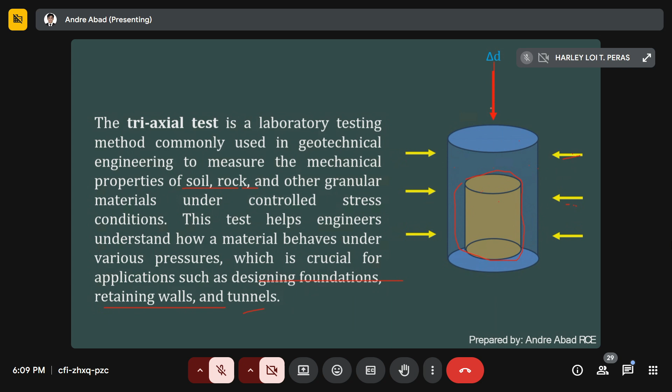Key components of triaxial test: sample preparation, a cylindrical sample of material.

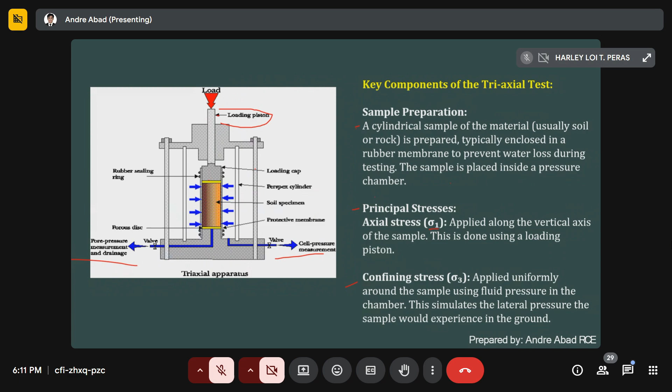Test phase would be consolidation. The sample is allowed to consolidate under the confining pressure, which allows the water within the pores to drain if the material is saturated. This simulates how the material behaves under long-term loads.

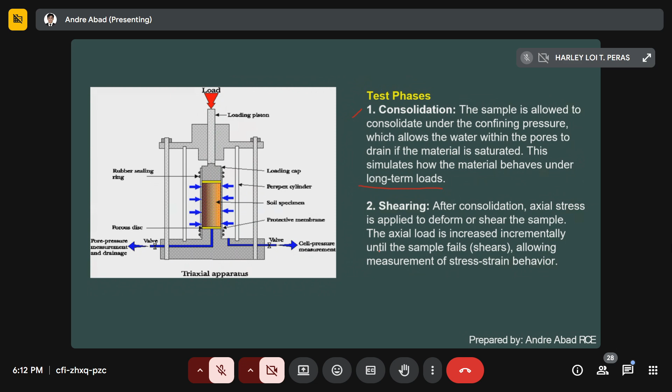Shearing: after consolidation, axial stress is applied to deform or shear the sample. The axial load is increased incrementally until the sample fails or shears, allowing measurement of stress-strain behavior.

Types of triaxial test: unconsolidated undrained. No drainage is allowed during the test. It is quick but provides only short-term strength parameters.

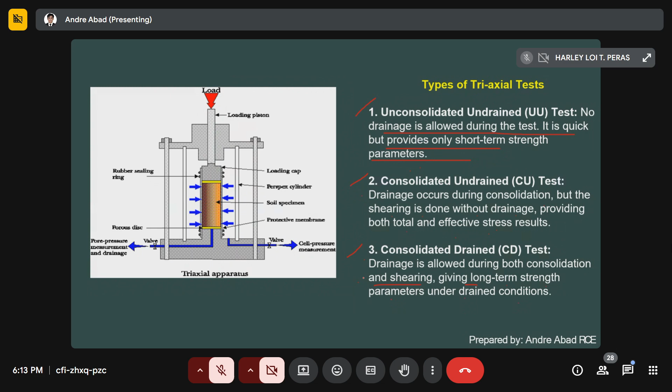Okay, so the parameter measured here is shear strength. The test determines the material's shear strength by calculating the maximum stress it can withstand before failure.

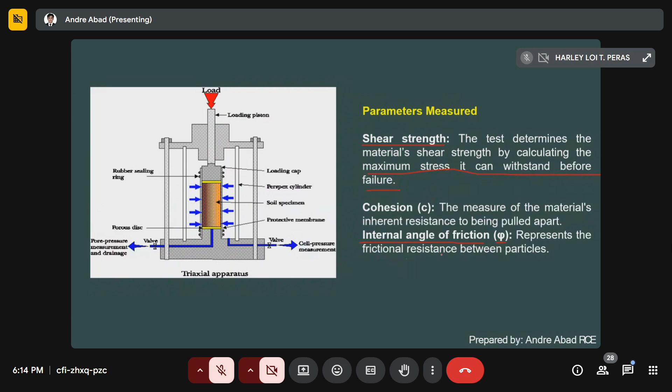And then cohesion, the measure of the material's inherent resistance to being pulled apart, and the angle of internal friction, which represents the frictional resistance between the particles.

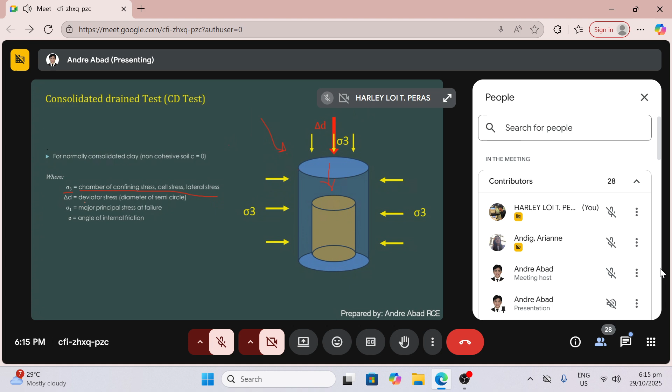And then the deviator stress, shown as the diameter of the semicircle, we can see in that form. The deviator stress is usually added on top of sigma 3.

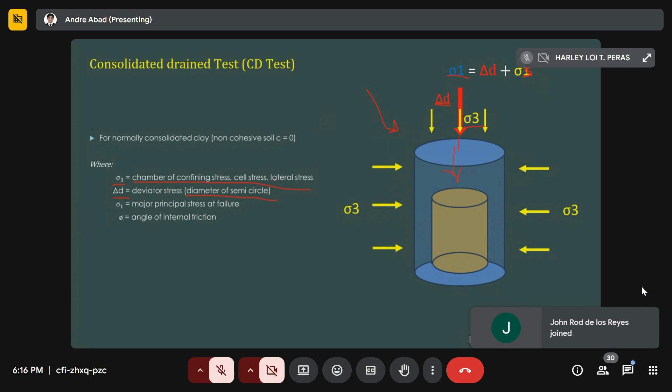Okay, and then the angle of internal friction, shown later. Usually it looks like this.

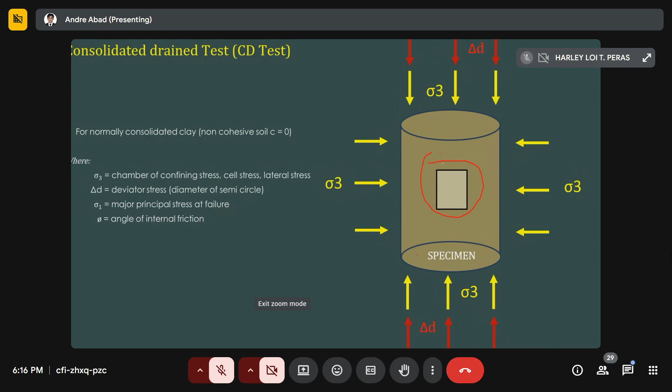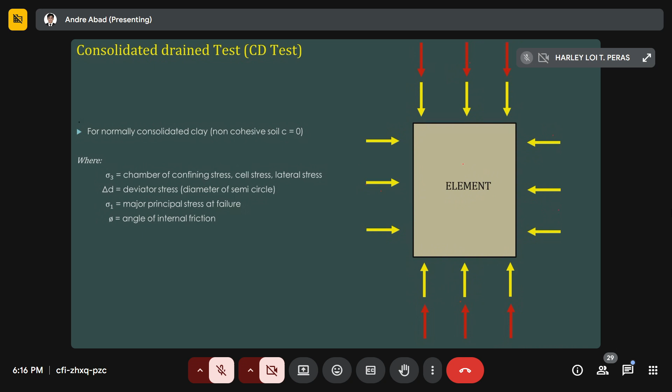So here, for normally consolidated clay, it's a non-cohesive soil, or C is equal to 0.

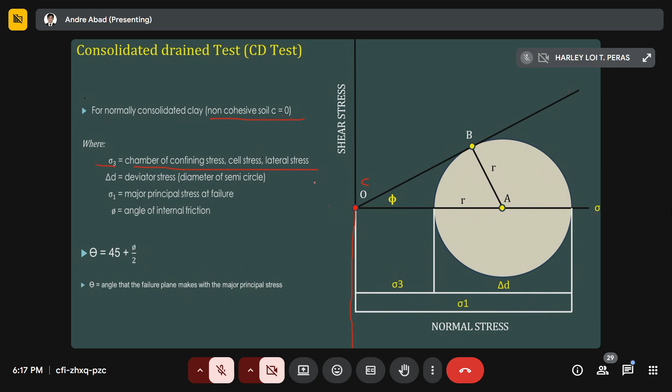Sigma 3, the chamber of confining stress, or cell stress, lateral stress, is here. Sigma 3, going from the point toward...

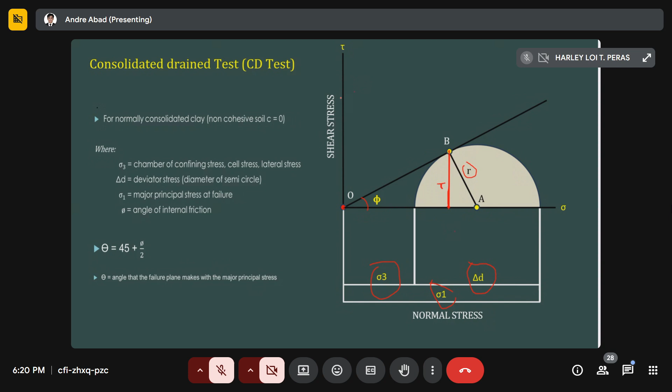If you plot R, its value, and sigma 3, your delta D, your major principal stress, then you can manipulate this illustration, this drawing. That's how easy this triaxial class is. So let's try not to miss this.

Okay, here's our sample problem. A consolidated drained triaxial test was conducted on a normally consolidated clay. The results were as follows: chamber confining pressure of 300 kilopascal, and deviator stress of 400 kilopascal. Now for the questions: compute the angle of internal friction of the clay sample, compute the shear stress on the failure plane, tau, and compute the effective normal stress on the plane of maximum shear.

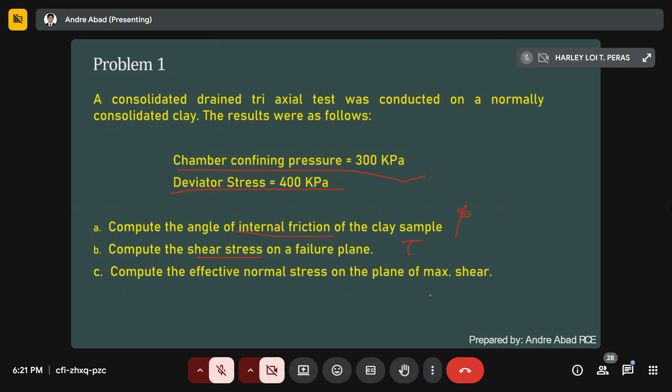Let's answer these one by one. First, compute the angle of internal friction of the clay sample. Let's input the given values: chamber confining pressure and deviator stress.

So R is 200 kilopascal. Why 200 kilopascal? Since delta D, the deviator stress, is 400 kilopascal, and the deviator stress is the diameter of the circle or semicircle, if you cut that in half, that becomes the radius, which is 200.

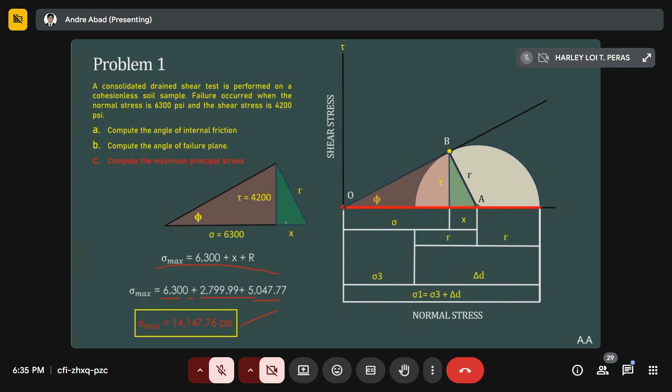Okay, so that's the problem done. Sorry, okay, so here's the next problem, the last one.

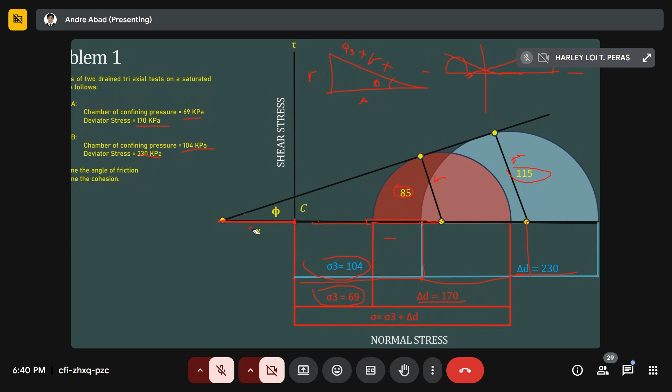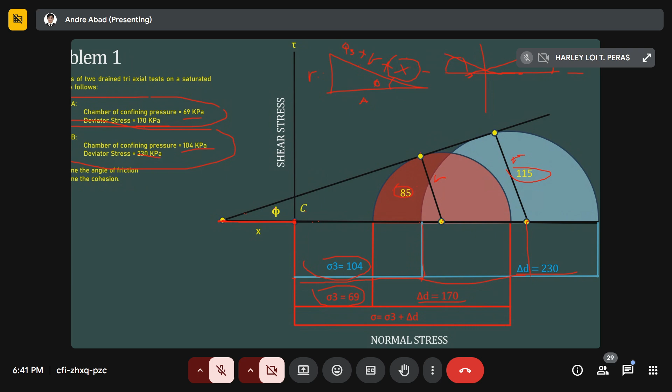Okay. So to get the angle of internal friction, we got an unknown x value. But our consideration is that we are given two specimens. So we can manipulate the value of x, the unknown x, using these two, to get the angle using these two specimens. Since they were the same during the test, our specimens share this during our test, so they have similarities, which is our angle of internal friction.

Okay, let's try this. So this is what happens here. Let's say, use sine: opposite over hypotenuse. We already have the value of the opposite, which is r equals 85 and 115. So what happens here is we don't have the value of the angle, and we don't have the value of x.

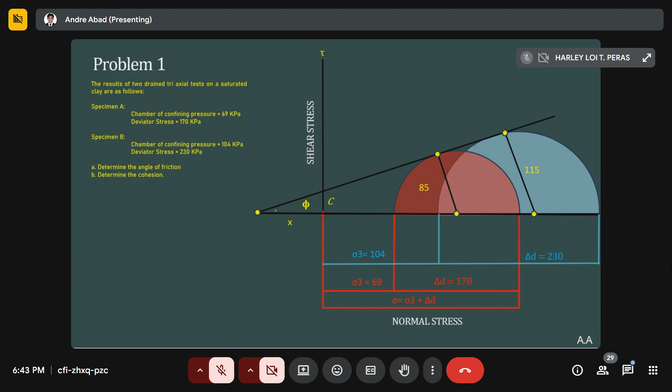Okay, so for this question, we use this small triangle. It's simple. So tan angle equals c over x, opposite over hypotenuse — wait, adjacent, sorry, c over x. Okay, so we have the value of the angle, and the value of x which is 30.17 based on the previous question in A, so we can get C which is 15.7 kilopascals.